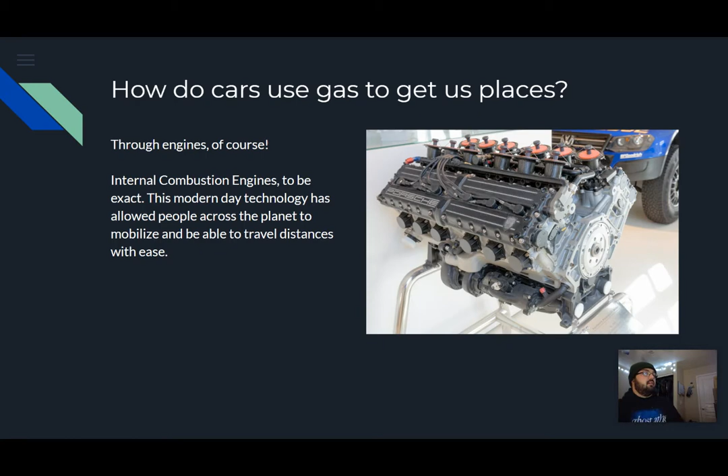The science behind this is deemed the four-stroke engine cycle, which has 4 steps: intake, compression, expansion, and exhaust.

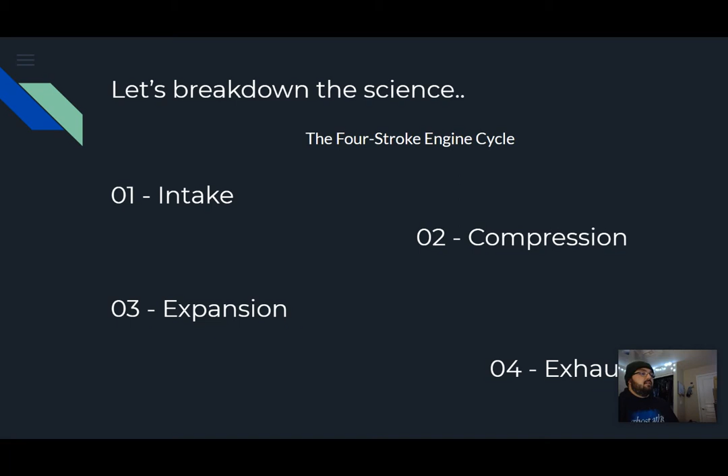The first step, intake, is where a fuel and oxygen mixture is brought into the cylinders via the intake valve, one of two valves on each cylinder. The camshaft and rocker arms help manage multiple intake valves as well as exhaust valves, which we'll talk about later. In order to increase power at this level, you can actually increase the amount of fuel you put in.

during that step in the mixture, and that will increase the energy density. In order to have higher efficiency, you can invest in cylinder deactivation technology, which, depending on the actual needs of the engine at any given point in time, will turn cylinders on or off. Turbocharging will actually allow for more oxygen to be brought in at this step and also assist in combustion.

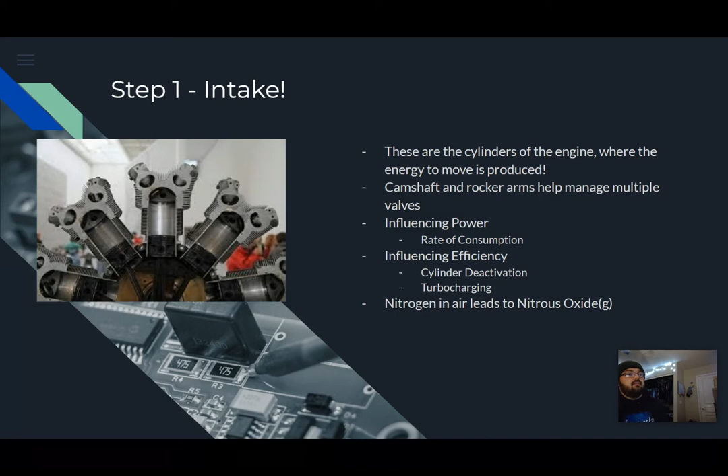The next step is compression. Once the fuel and air mix has filled the chamber, the piston starts to compress this mixture. The larger the cylinder, the more power you can get out of the reaction because there's a larger amount of gas being compressed. Maximizing the amount of compression you have prior to ignition will increase your efficiency.

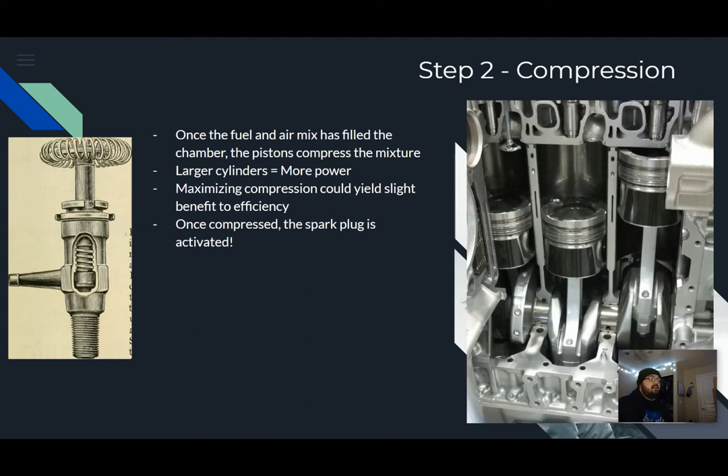Once this gas is compressed, the spark plug activates and ignites the mixture, and then we have expansion. In this step, the ignition causes an explosion within the internal chamber, and this pressure pushes the piston back downwards and turns the crankshaft. This is where the chemical energy is changed into kinetic energy and propels the vehicle forward.

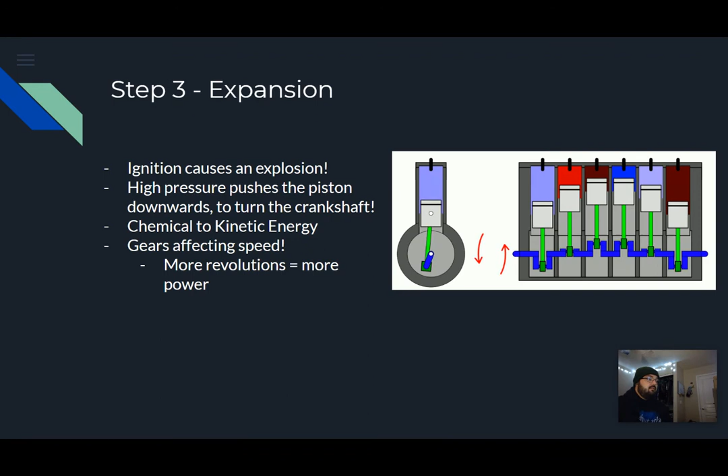Depending on the gear, you can affect how much power you're getting out of it for the same volume of gas or fuel being used, which affects the rate at which it turns.

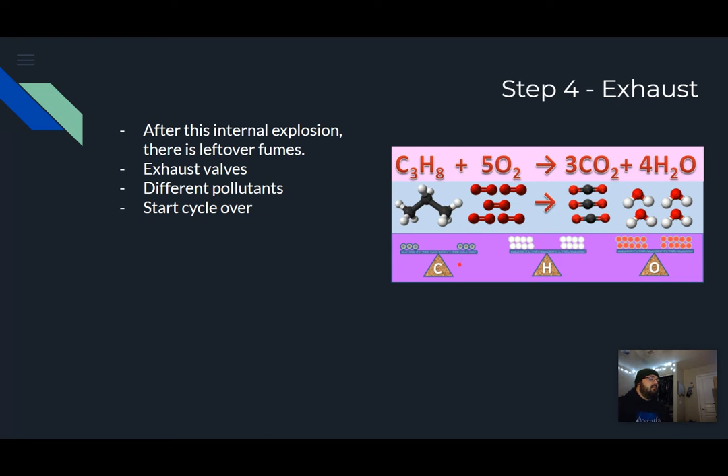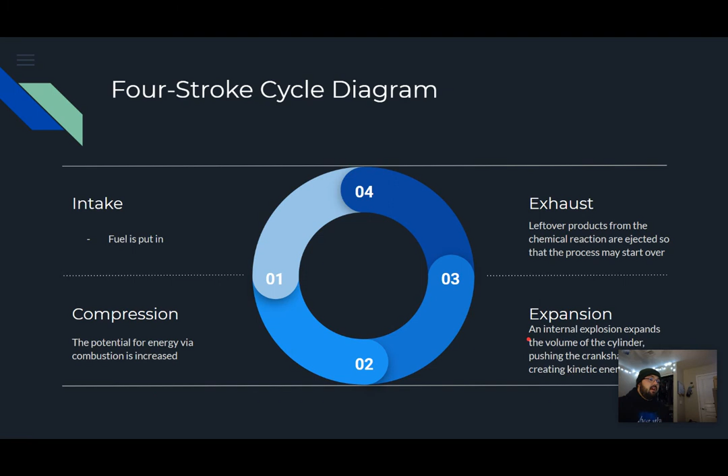This is another quick review of the full cycle. You'll have the intake, where the fuel is put into the engine or cylinders; the compression, where it's compressed and put into denseness; the expansion, once it explodes, where the kinetic energy is formed; and then the exhaust, which is the leftover fumes.

Other opportunities to increase power and/or efficiency in the process include having an engine that is best suited for the vehicle's needs. You don't need an oversized engine for a small vehicle, so that is one method.

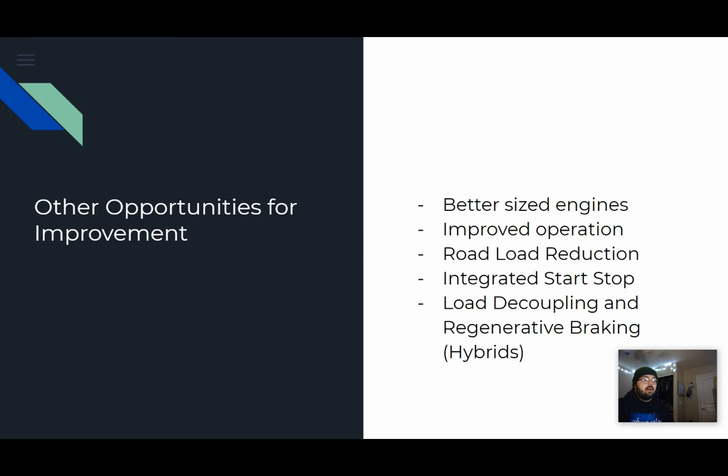Improved operation can have a list of implications, which goes more with driving habits. Road load reduction involves reducing weight, friction, and other things that affect efficiency. Integrated start-stop reduces idle time and wasted fuel, and load decoupling and regenerative braking are hybrid technologies that help increase efficiency.